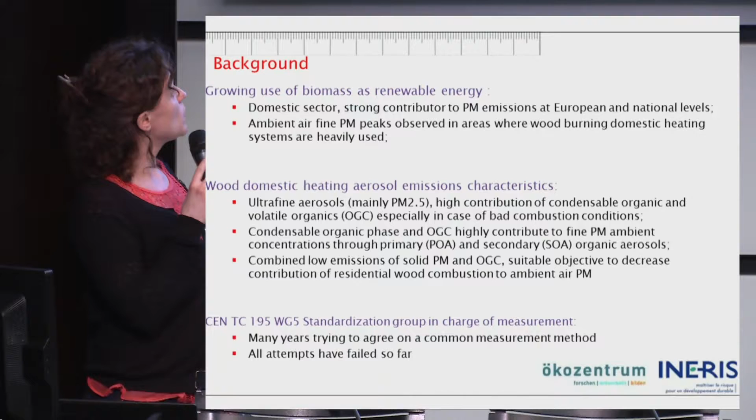Those organics, the ones that condense quickly, and the OGCs, highly contribute to PM ambient peaks through the formation of primary organic aerosols and secondary organic aerosols. So those compounds are formed once the emissions leave the chimney. And there is evidence that shows that combining low emissions of solid particulate matter and OGCs, to our knowledge, is a suitable objective to reduce the contribution of residential wood combustion to ambient air pollution.

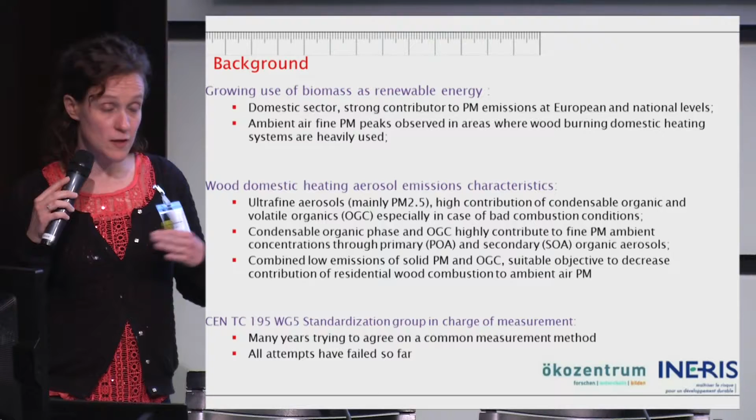I won't go in detail on the standardization work because it's been already presented, but just to summarize, there have been many years trying to agree on a common European method. I took part in the last 8 years, but I know that there have been many more years and many attempts to reach a common method. So it's a new attempt. So I hope we manage.

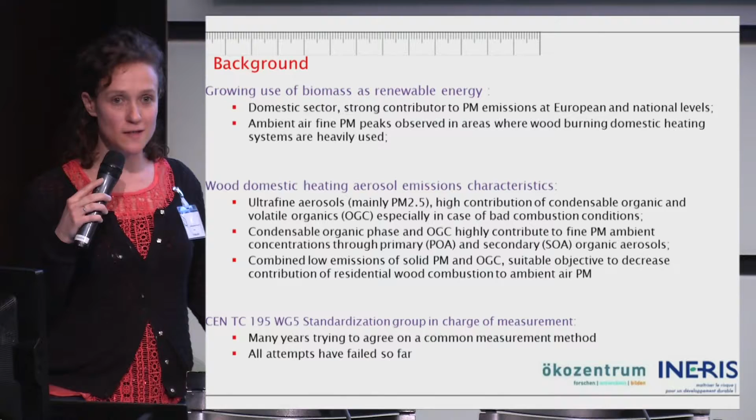Okay, so I'm not going to go into detail because this has been already mentioned this morning. So the work on reaching a common European method is taking place in parallel to the work on the eco-design regulation. I'm not going to mention all those points because they've been already mentioned this morning, but we are in this process of accompanying the regulation process.

Regarding measurement methods, there are 2 requirements that are necessary to reach for the future. The first one is the one that concerns us: to propose a unique method for the measurement of particulate matter emissions instead of the 3 methods which are used now. So that was the aim of the EN-PME-Test project.

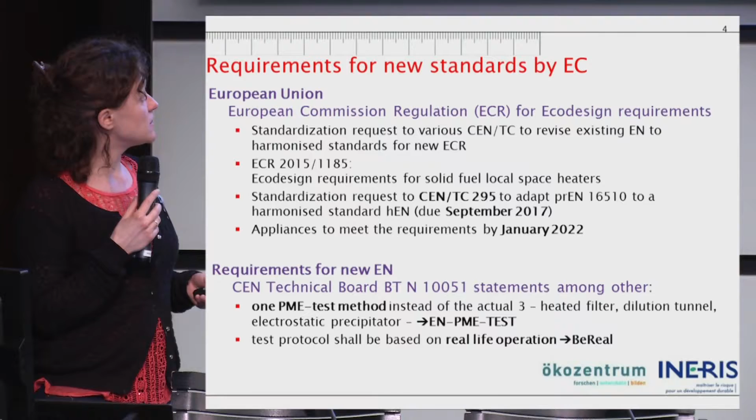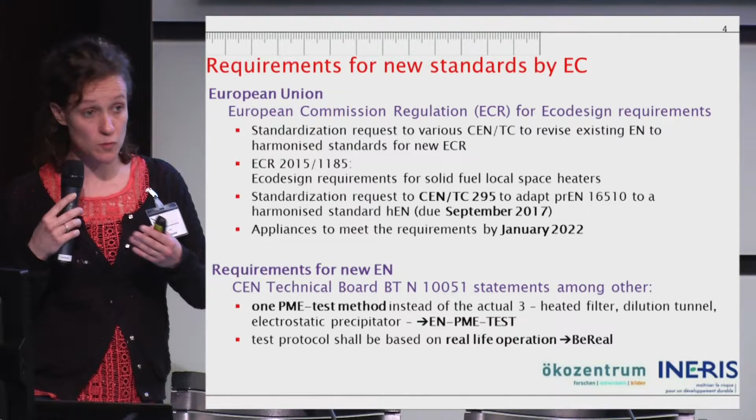And the other one, that I won't be talking about today, is defining test protocols or firing procedures that are based on real-life operation. And on that topic, there was another project called Be Real, where other people, or in some cases the same people, were involved, and they worked on those tests and those types of protocols.

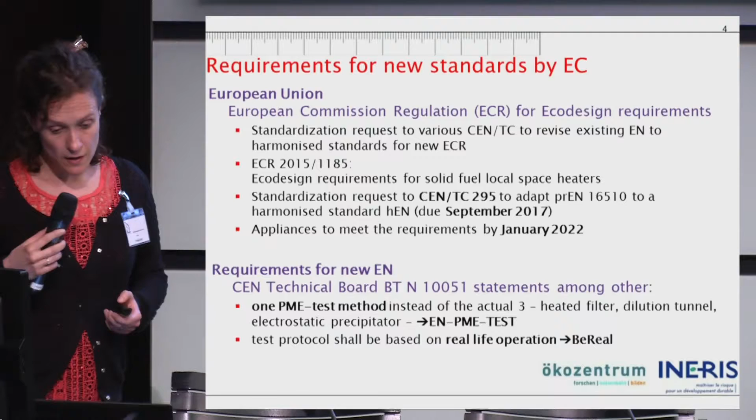Okay, so in terms of the methods that we tried to propose, what were our aims, or what were the requirements that we followed? Low investment costs for the test laboratories. The laboratories which perform the tests, the notified bodies, are not laboratories which are used to spending big amounts of money on emissions measurements.

They perform different types of tests, but they are not prepared to buy very expensive and very complicated equipment, because buying is one thing, but using an expensive equipment is also very expensive, because you need very technical people who have to be trained, and it's quite expensive.

Another thing is that we need a very low limit of quantification. The limit of quantification is the values that you are able to quantify, which means that you are able to evaluate the reliability of these values. It's not only the values that you can give, it's the values where you can say you can rely on this value because its uncertainty is such. And we need a low limit of quantification because the threshold limit values are going down, and we need methods that can be used in front of those values.

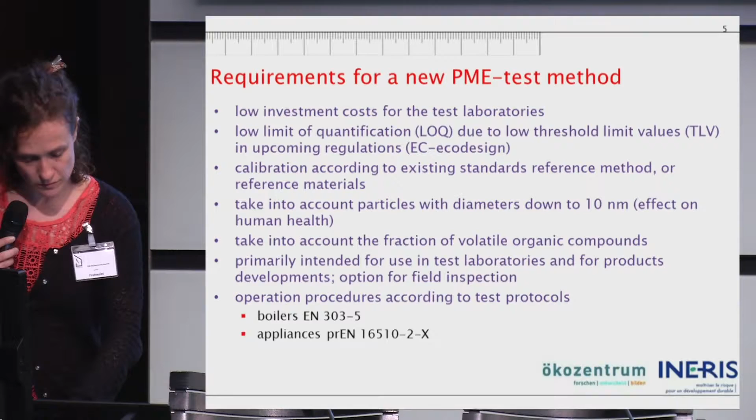So a few words about the project. This project was performed under the umbrella of the ERA-NET call. We call it a co-normative research project. Its aim was to establish a scientific basis for a test method to determine solid and condensable particulate emissions from residential heating appliances and boilers burning solid fuel.

So as we said this morning, the actual standard allows two different methods, which is a kind of improved DIN plus method and the dilution tunnel. So it's still not optimal because there is no one unique method. The aim of the test method was to address relevance to health, environment, energy conservation, covering the needs for product development, type test approval, and field inspection.

I won't go into detail of the project, but we had a kind of two-step strategy. Quite early in the project, we realized that it was going to be complicated to agree on a very innovative method at a European level. We were 10 countries, 17 partners. So we decided to find the best compromise on a short-term method and to continue working on other approaches for the future. So today we'll be mainly focusing on this short-term approach that we defined in the project, but there will be a few words said on the long term also.

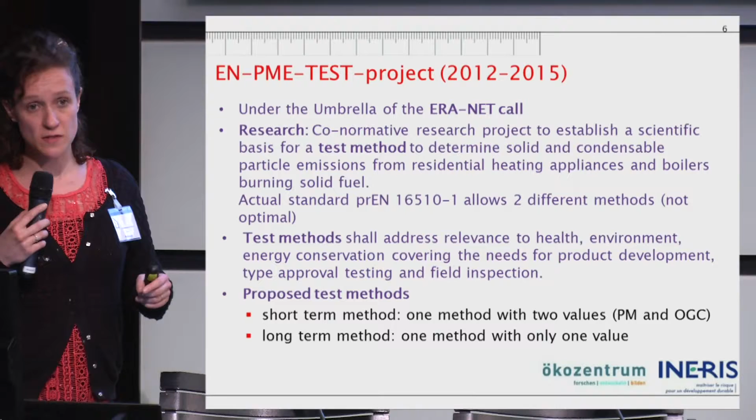Okay, so the project was a consortium of 17 partners from 10 countries. It involved different research institutes, universities, notified bodies, many of them involved in TC295 WG5, and most of them closely connected to the authorities and the industry. We always tried to get feedback from the different stakeholders. The funding was either self-funding from the project partners, and also some countries were funded by the National Environmental Agency. And there you have the logos of the different partners who took part in the project.

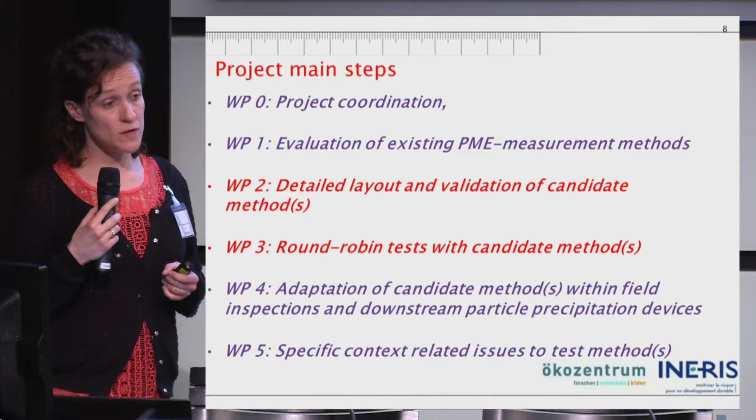So these are the different work packages of the project. I'm only going to focus on the results or the outcomes of work packages 2 and 3, which are the most technical work packages. Work package 2's aim was to agree on different candidate methods, to describe them, and to identify where the gaps in knowledge were and what research was to be performed to improve the methods. And work package 3 consisted of round-robin tests with the candidate methods.

So for work package 2, the main outcome was the definition of different methods. One of them was this short-term method. Basically, this method is nothing new. It's based on existing methods, which were the heated filter and the OGC measurements. But the idea was that there were some improvements to be made in this method, especially the particulate matter sampling. And it was improved strongly to make it more reliable.

For example, one of the main parameters that influences the repeatability or the reliability of the method is the temperature of sampling. In the DIN plus method, for example, the temperature of sampling was 70 degrees. But it was not mentioned whether it was 70 degrees in the flue gas, or only 70 degrees as a setup temperature. We didn't know. Anyway, we decided to use the highest temperature possible in order to sample only the solid fraction on the one hand, and use FID, which is an analysis that many notified bodies are equipped with, that many industrials know already.

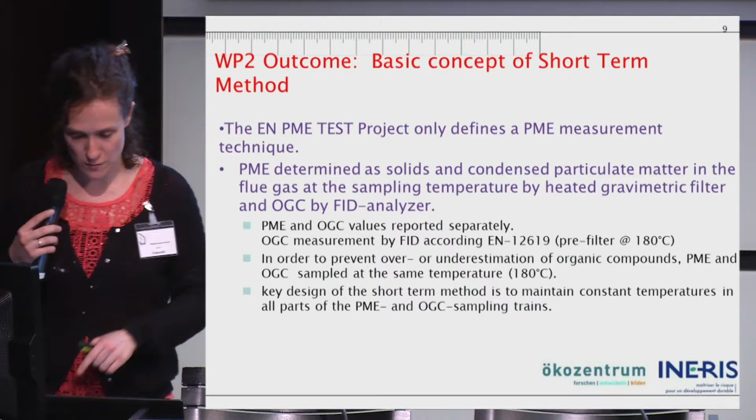Okay, so what are the boundary conditions of our method? We use the threshold limit values that were already known in 2011-12. These are the limit values that we intend to be able to reach, or to be in the range of. And our measuring range is much wider, because we know that for product development and other types of application, we need a method that is able to measure a wider range.

I'll talk about the limit of quantification. These are the limits of quantification that were determined during the project using standards that are used by INERIS, for example, for industrial emission sources. For OGCs, we assume a limit of quantification of 10 milligrams carbon equivalent per cubic meter. And for particulate matter, by using a weighing scale with a high resolution, we can reach 3 milligrams per cubic meter.

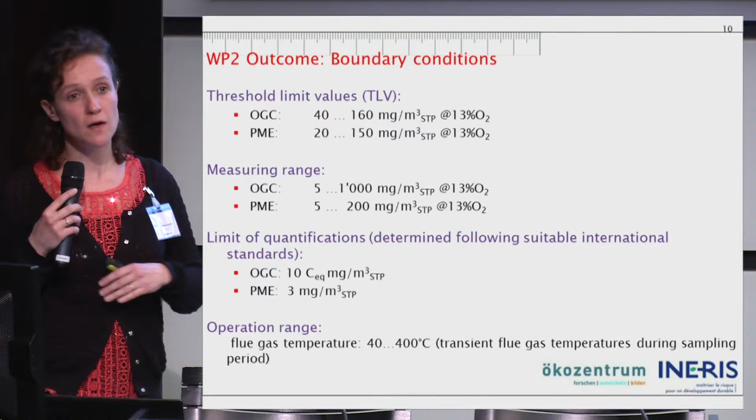And the operation range: in order to apply this method to a wide range of appliances, from wood log stoves to pellet boilers, we needed the method to be usable in a wide range of flue gas temperatures. So the aim was from 40 to 400 degrees. Of course, the method hasn't been tested at all those temperatures, but some tests have been done to show that we managed to maintain our temperature.

Work package 3. The aim of work package 3 was to perform round robin or intercomparison of methods. Intercomparison is a way of determining the uncertainty of a method, so it's a very important step in a standardization process. We performed 2 intercomparisons of methods. The first one took place at INERIS in France in February 2014. It involved 13 laboratories from 8 countries.

So this is the place where the intercomparison took place. It's a testing bed for emission measurement, used by INERIS to perform intercomparison of the laboratories in France which perform emission measurement from industrial emissions. It's mandatory in France for laboratories to take part in those intercomparisons. This bench is equipped with 3 different boilers, one of them a pellet boiler. And it's a loop with 12 sampling ports, which have been shown to be homogeneous for particulate matter below 2.5.

We used this bench to perform 3 days of intercomparison using different methods, and one of them was this short-term method for the heated filter. The second intercomparison took place in the Czech Republic in October 2014, and it involved 9 laboratories from 8 countries. They designed a bench for the purpose of the project. And during this intercomparison, they focused more on the influence of the sampling velocity on the reliability of the method.

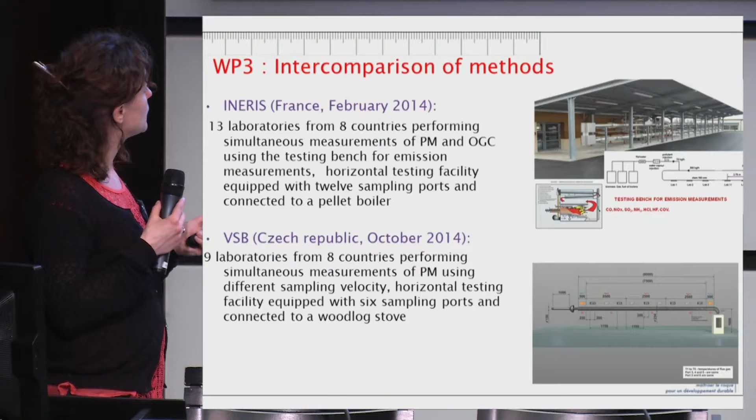But OGC is a parameter that has been regulated for many years for stationary sources, so those laboratories are very much used to perform OGC measurements. And OGC is a bit sensitive sometimes to high concentration. It can get quite dirty, and at high concentration sometimes, well, might not help.

So the conclusion of this first part. Concerning residential wood combustion, the stakeholders recognized that there was a need for a reliable, unique European method, and the aim of the project was to establish the scientific basis to agree on a common method, and it gathered a wide range of institutes in Europe. We tested several offline and online methods, and we ended up with the proposition of combining the PM collected on a heated filter and OGC measurement using FID.

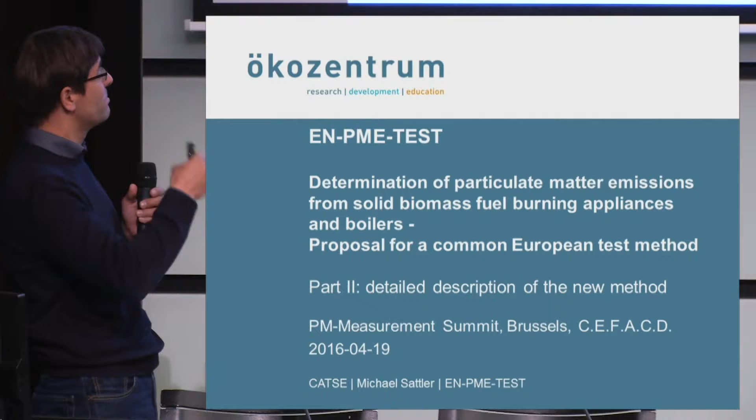I will talk about the technical details of the method we developed in this project that Isaline just presented. And I'll give some input on the basic layout. We have three main things that are actually different from what you probably know from heated filter measurements. And it's the probe itself. We did a special heating system on the probe itself. It's also much longer than everything else we saw before.

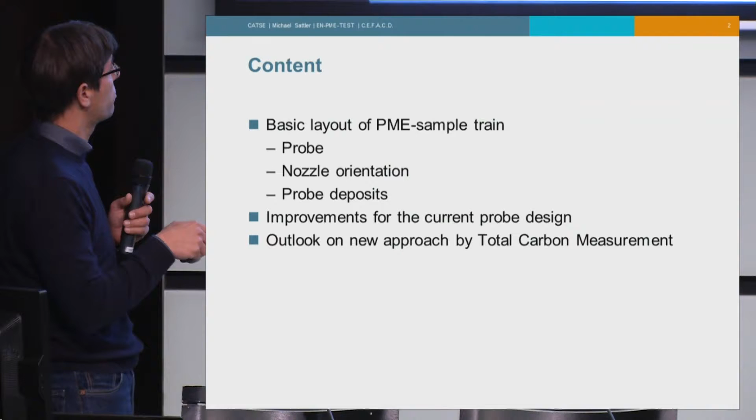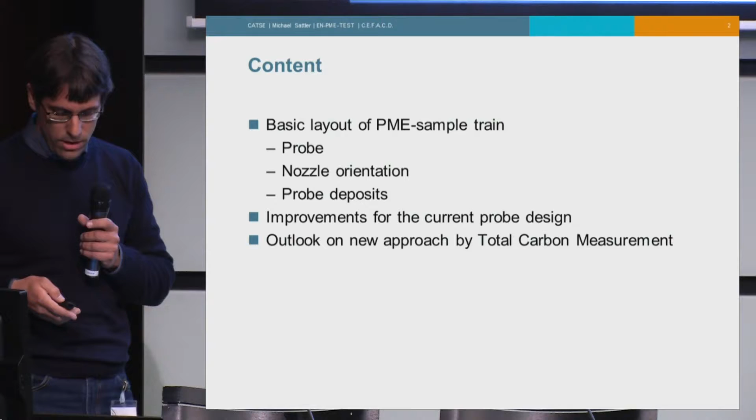We have the nozzle orientation, so it's not isokinetic sampling anymore. It's a 90-degree sampling, and we have the deposits in the probe that before were normally rinsed. Now we try to do it with just air blowing through it and collecting the deposits. And then I'll give also a short view on what we should improve on this method, because, of course, it's never finished, but also we as the project team see that there are some improvements to be made, and a few words on the long-term approach we also developed in that project.

And well, in other methods, there is this overlap. If you do not have a pre-filter at exactly the same temperatures as your particle filter, you will have an overlap. It's not very clear how big this is, but still that's just one condition we gave to the method.

Then this 180 degrees, Isaline already said some words about it. Our idea was actually to measure these particles as pure as possible. So we tried in a way to separate minerals and soot from the organic components. And that's the reason why we set this temperature as high as possible.

In the discussions we had during the project, we wanted to go up to 200, 300, 400 degrees, but then you run into problems with the FID, so there are no devices that measure OGC at that high temperature, and also you run into the problems just with the fitting and all this. The PTFE has a temperature of around, I think, 210 before it's melting. So you must be able to use these components.

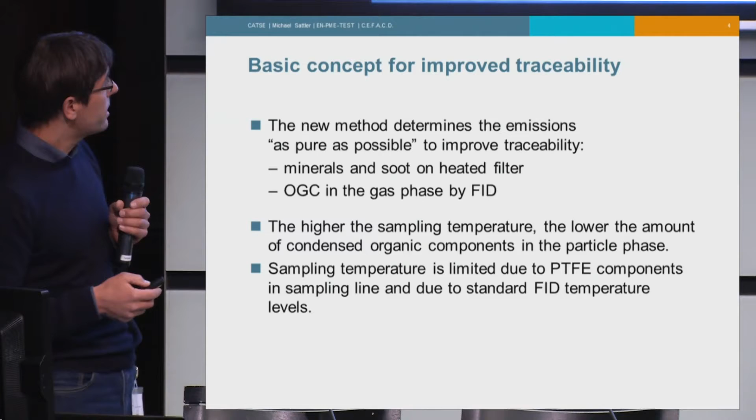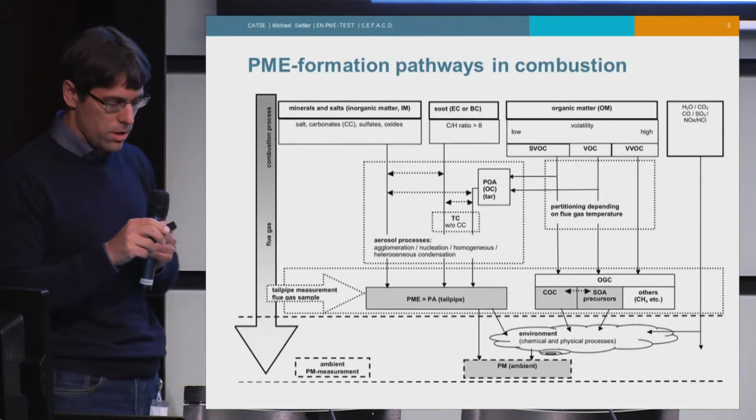So in this next slide, this was developed during the project. You see, this is sort of the PME we measure on the filter, the mineral salts and the soot, and this is the OGC we measure in the FID. And of course, we are very well aware that there are some interconnections, so it's not an absolutely straight approach, but at least this was our intention behind all this.

The probe itself guarantees the temperature of 180 degrees, not only on the outside, but also on the inner wall of the probe. So we do not want any part of the probe that is not at 180 degrees, because we will end up with some problems. If you're colder than this design temperature, you will have condensation on the wall, and if you're higher than the design temperature, you may end up evaporating something that you already collected on the filter. So there are different reasons for keeping exactly this temperature, and we developed a system to do that.

The nozzle orientation is actually something that is just for repeatability. We saw problems in isokinetic measurement at low flue gas velocities, and we saw the possibility that with isokinetic sampling you can have quite big particles that by chance get into the sampling train or not. And if we put a 90-degree orientation of the nozzle, we have some sort of a cutoff. I wrote here, I think this setting is more in line with ambient particle measurements. So we are sort of excluding the very big particles with this system.

We cannot tell an exact cutoff. I'll show these slides later on, but at least we have an idea that we are between PM20 and PM50 or something, and exclude the very big ones. That's for repeatability of the measurements.

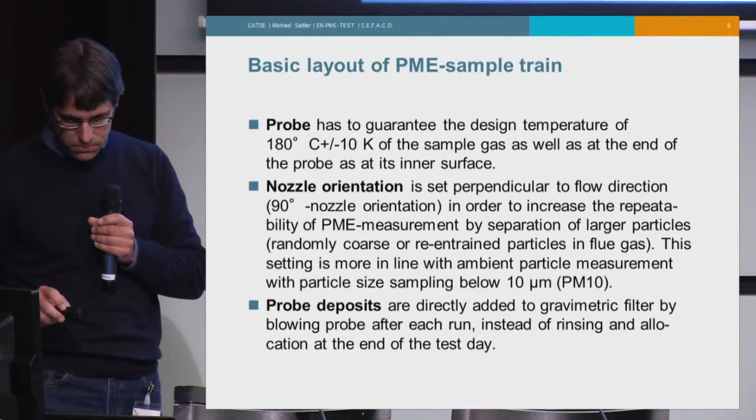So this is the setup we have for heating our probe. At the moment, it's a very long probe. It's a 2-meter long probe. I'll show you the graph why. And we have just a power source here with close to 10 volts, and the current is around 30 amps. So you have a plus pole in the middle and the 2 negative poles on each end of this long probe. And the probe itself acts as a resistor, so you can heat up the probe by electricity. A very easy and simple thing.

All you need to do is actually take quite a small tube. So the cross section of the metal part of the tube must be quite small. Otherwise, you will not be able to heat it.

You could also attach these poles directly to the stack and to the filter. That way, you would have a perfectly heated line all the way through, so no connections are needed that are not heated.

And one thing on the temperature measurement itself. What we measured is actually the temperature of the gas at the outlet of this probe. So we had some thermocouples right in here. And for the regulation of the whole system, to keep it at a constant temperature, we have a thermocouple soldered onto this probe, so as not to disturb the flue gas flow.

But in this way, you can actually calibrate it once, and because the outside temperature is always the same on the thermocouple that you have on the probe, you are sure that the gas temperature that will come onto the filter will be at the value you calibrated before.

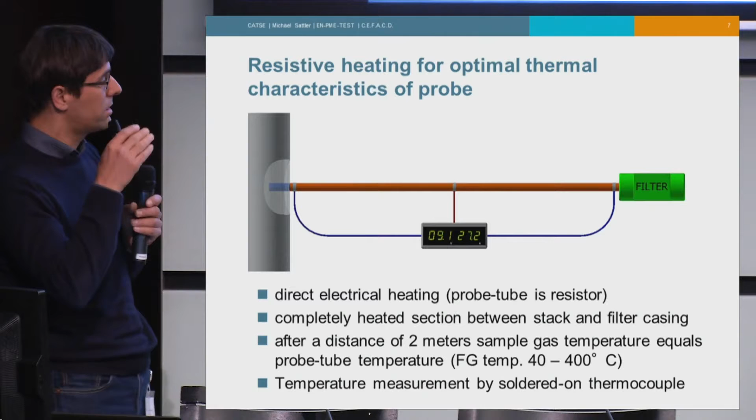This is a graph that shows the reason why we have a 2-meter long probe. We see here the temperature, and the time in minutes is not that important, but what we see here in blue is the flue gas temperature at the inlet of the probe. We had it at 400 degrees in the beginning, then we let it drop down to 40 and go up again to 400, which in a normal type testing procedure is not very often happening, but at least these were the boundary conditions we gave our method.

And within this variation of flue gas temperature, we could maintain a temperature of 180 degrees plus minus 10. In the beginning, we were close to 190, and at the point where we have the lowest flue gas temperature, we were close to 170 degrees, but always within these specified boundaries. Of course, if you know exactly that your temperature range in a type testing situation will not be 400 to 40, you can also adjust the length of the probe.

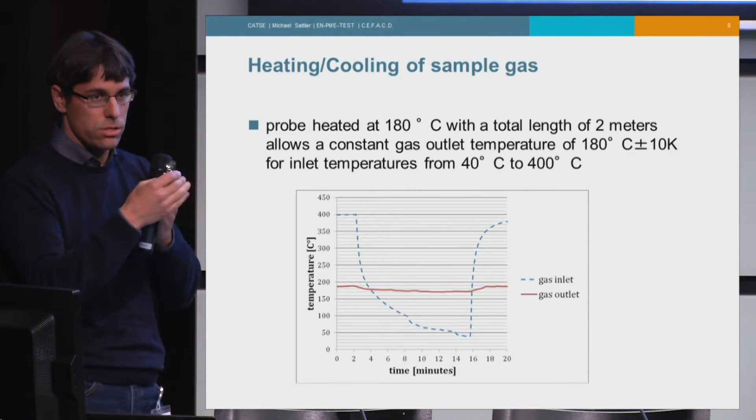Now, the nozzle orientation. We saw that in low flow situations, as we normally have in small stoves, it's more or less difficult, or as it says here precisely, impossible, to sample isokinetically. So we will never be really isokinetic, that's one thing. We have these randomly re-entrained particles in isokinetic sampling.

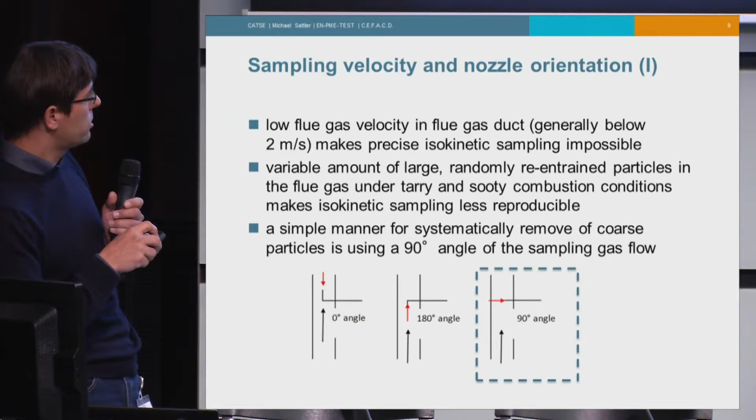And a simple approach to actually remove them is this 90-degree approach. I saw there were some shiftings, it doesn't matter. You do not have a nozzle pointing towards the flue gas, but at a 90-degree angle to the flue gas. And this cuts off some particles, as you can see here.

This is a graph that shows how much of the particles are actually sampled on a filter, and this is the particle diameter. Here you have different situations. The meter per second is always the flue gas velocity, and this is 2 millimeters, the nozzle diameter. Here, ref stands for 8 millimeters. So we're actually looking at the orange and the red case.

And we see that in our normal operation conditions, we would have a cutoff at the 50% sample fraction of about PM 20 to, as I said before, PM 50 more or less. So this is the range where we have a cutoff with this very basic system of removing the very big particles to increase repeatability in this method.

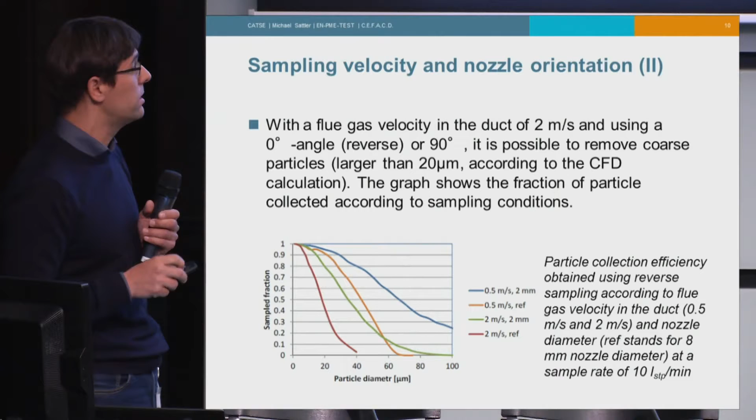Then the deposits, as said before. We saw a way of changing this system, and we could show that the deposits were normally between 5 and 30% of the total mass. And rinsing is actually quite error prone. If you do rinsing, especially with a 2 meter long probe, you really run into problems in handling and how to do it, and you have the chemicals and all that stuff.

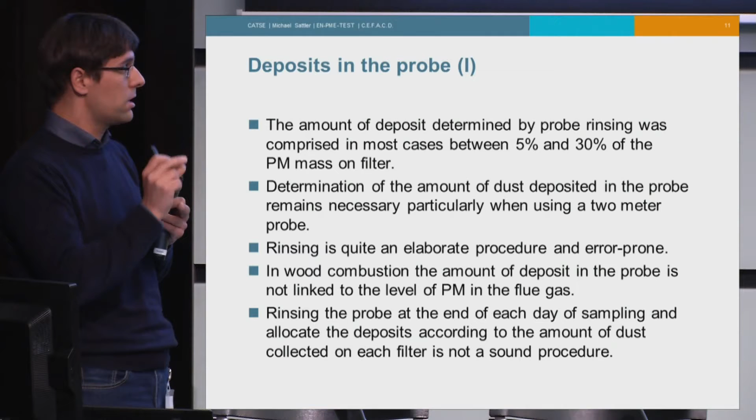And we tried to make it much easier. And also the other problem is the allocation of the rinsing you get at the end of a test day to the single tests you do. At the end you have 5 milligrams, and these different tests have different milligrams of particles on the filter, and allocating this according to the mass on the filter is also problematic, and that's shown in this picture.

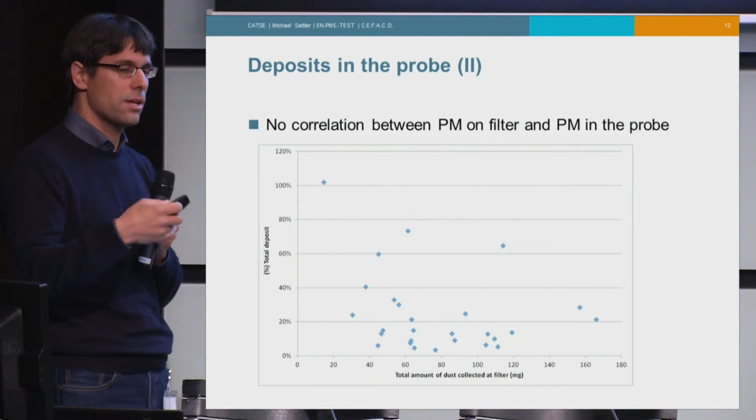We have here the total amount of dust collected on a filter, and the percentage of this in deposits, and if the percentage were constant, you would have a flat line, and that's just not the case. So we see there is no clear correlation, and therefore we said the allocation itself is a problem, and it would be very good to have not a rinsing in this case, but a cleaning after each trial.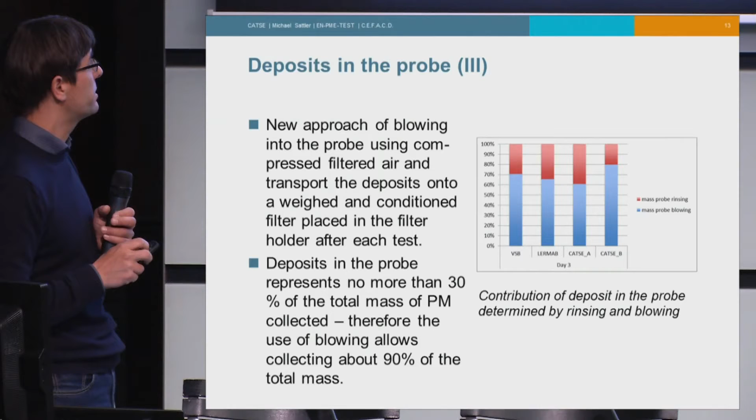And that's what we try to do with blowing, and we saw that normally we have not more than 30% of the total mass in the probe, and of this 30%, we get out at least some 70% or 2/3 by blowing. So in total, we collect more than 90% of the mass by filter plus subsequent blowing through this probe. And at the moment, we said, okay, that makes it so much easier that we stay with this uncertainty of 10%. You could also add a fixed value or something. But that's what we do at the moment.

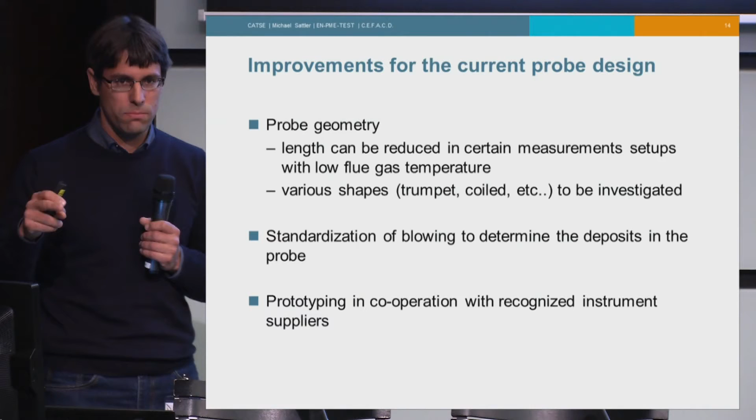What are the things that have to be improved? We know that probe geometry is not perfect. 2 meter is a problem. You could have different shapes. You could have a trumpet, you could have a coil or whatever. And this has to be developed, of course, and also according to what you're really testing. I mean, if you're testing a sauna stove, you maybe need this 400. If you're testing a condensing pellet boiler, you definitely do not need a method that goes up to 400 degrees. So you could actually shorten your probe.

And the standardization of this blowing method for rinsing the probe is not very well defined at the moment, to be honest. We did this in one of these tests in Ostrava during 1 week, I must say, and there were quite a lot of samples, but still, it was like one event during 1 week where we tested this. All I know is that many labs do it to actually clean their probe and say, okay, afterwards it's clean, I can restart sampling. So that also gives a hint that it removes quite a lot of what's deposited in a probe.

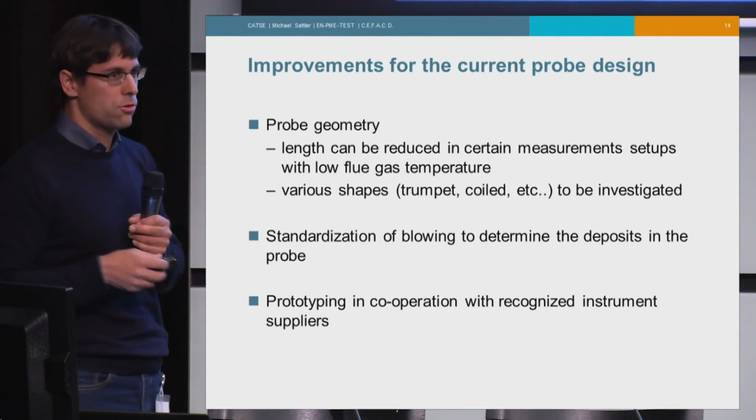And then this is probably the next step. We have to go together with somebody who normally develops such instruments, and we have to find a way on how to actually manufacture those. Because at the moment it's a prototype for the laboratories, and there are many things to be improved until it can be sold to the laboratories.

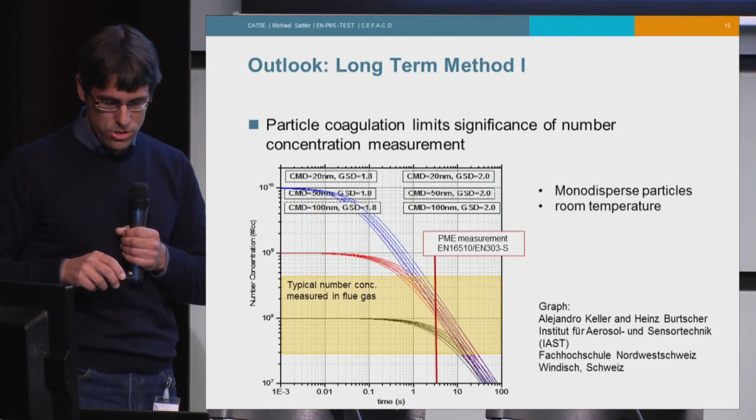Now I come to a very short outlook on what we plan for the long term. This is a slide for those who still believe in particle number concentration as a good indicator for emissions. It just doesn't work, but if everybody is convinced, I'll leave that slide. Otherwise, we come back to this afterwards.

What we have in mind at the moment, and that goes back to what Isaline said, the OGC are the precursors for secondary organic aerosols in the atmosphere. And a partner institute of ours in Switzerland, Heinz Burtscher and Alejandro Keller from the University of Applied Science, they develop a method to actually age aerosols very rapidly. So they can take flue gases into a little chamber, they add ultraviolet light, they add ozone, and they wait for about 2 seconds or so, and afterwards they have formed particles that would otherwise be formed in the atmosphere during days or even weeks. And by this, they can actually sort of foresee what happens with this specific flue gas in the atmosphere.

And they are planning to do this, and afterwards not a normal mass measurement, but actually a total carbon measurement. So they're building an analyzer at the moment that analyzes every, I think it's 2 or 3 minutes, the total carbon content of what they collect on a filter after this micro smog chamber. The flue gas comes in, the particles form, they come together with the particles that are already there, and then you collect everything on the filter and you measure the total carbon content of that filter. And this gives you a very good indicator on the quality of combustion. That's for the long term.

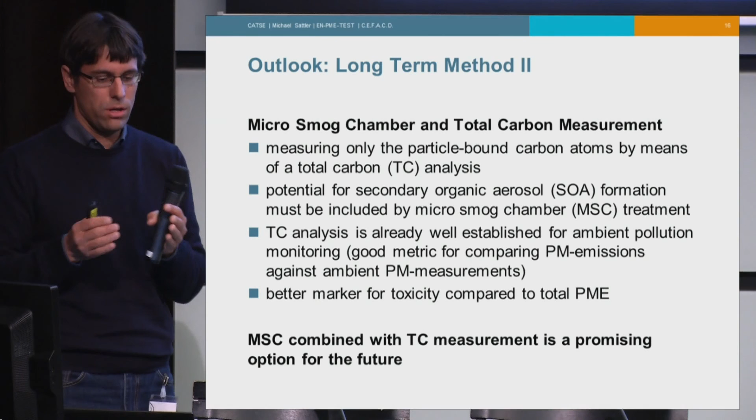And at the moment we see a possibility that maybe both methods could join in the future. So the gravimetric as something that is still needed for special fuels, for example, like straw, where you have quite a lot of minerals but no, or nearly no organic components, and the gravimetric measurement together with this TC measurement after a micro smog chamber could maybe be a vision for the future.

That was it from my side. To the method, I have not talked about the procedure on how we fire the appliance and all that stuff. That's something totally different. We have just developed a method on how to measure things. And I know a few years ago, I sort of learned from Christian. He was the one that brought in the dilution tunnel, and now I'm the one bringing in a different solution, and I'm quite convinced of this one.